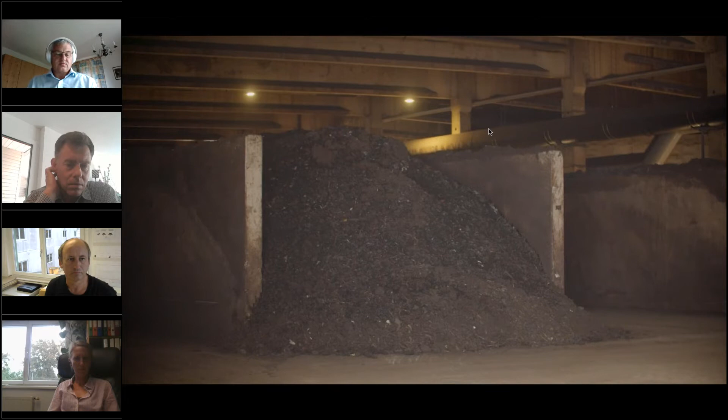Augsburg, Germany. DiBiCoo is an EU-funded project within Horizon 2020. The aim is to bring established biogas markets together with upcoming biogas markets over the world. The waste treatment facility in Augsburg consists of an incineration plant next to a combined anaerobic digestion and composting process. The biogas plant deals with about 105,000 tons of organic wastes, such as bio-waste from bins and green waste.

The output is about 45 gigawatt-hours of biomethane, which is injected into the gas grid and corresponds to a supply of around 4,500 households with renewable heat energy. Additionally, around 20,000 tons of compost and 23,000 tons of liquid fertilizer are produced per year. The proximity of the waste-to-energy plant is a great advantage, as the entire energy requirement for the system comes from the waste incineration. An integrated exhaust air purification system ensures that the odor-intensive air from the digestion plant does not get outside, but into the furnace of the thermal power station, where it is used as combustion air.

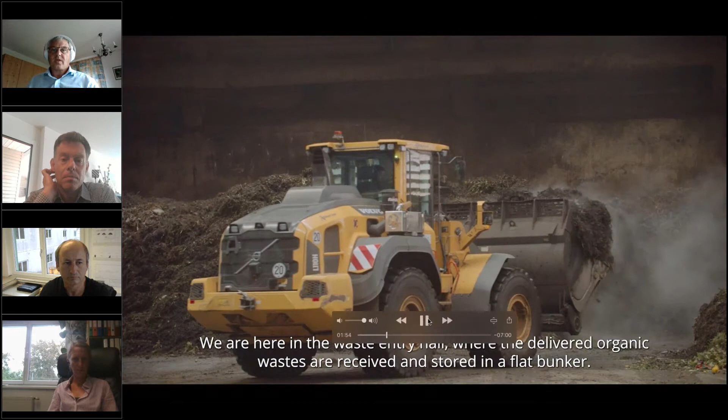In addition, the biofilter also provides valuable services. It consists of crushed root wood on which microorganisms settle. These break down the odorous substances biologically. We are here in the waste entry hall, where the delivered organic wastes are received and stored in a flat bunker. The wastes are mixed with tree and shrub cuttings and fed to the coarse processing.

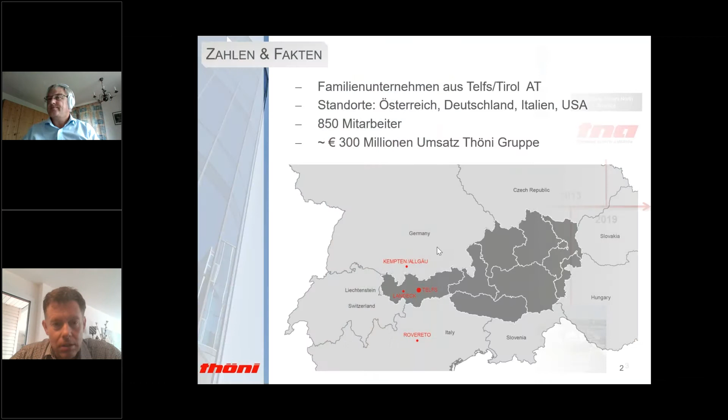I'm not sure if you understood right, because the quality was really bad. Reinhard, could you follow? Yeah, I think I could follow, or I try to follow. And Sindre, maybe you can switch over to my screen so that everybody can see it. Sindre, may you switch the screen? Can you see my screen right now? Yes, we can see it. Oh, now I have to go to the end of the presentation. Sorry for that.

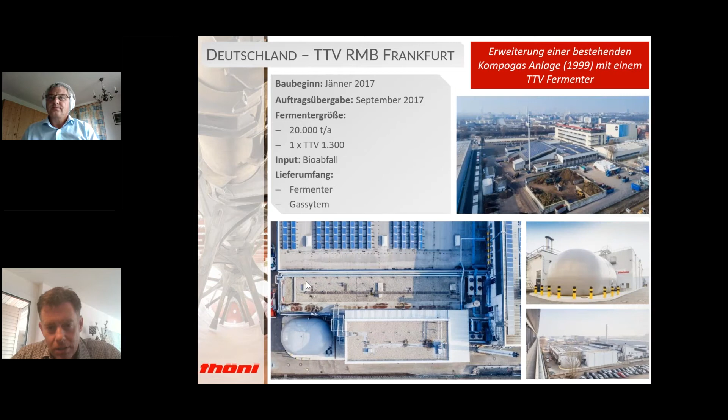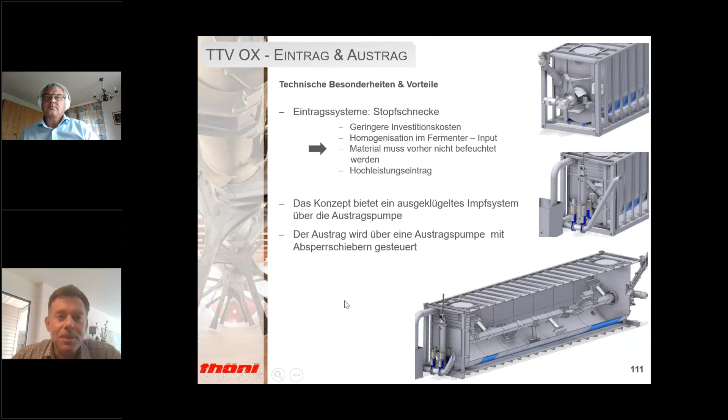But we have a very special product within Thöni, and it's called the TTV Ox. It's a quite nice and interesting product. It's a very small digester. As you see, it's built in a container, and in principle it's the same, just a mini digester. And if you talk about really small amounts of waste, this might be suitable, particularly for African utilization of small amounts of waste.

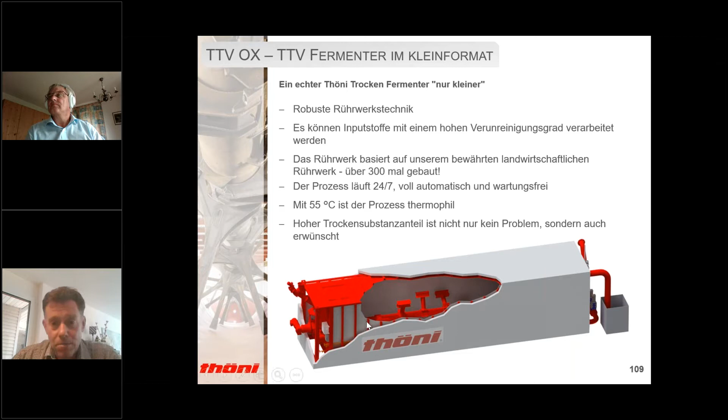And as you see, the principle is the same. You have a plug flow digester, you have a quite small agitator and a stirring system. You pump in the input material, you take out the output material. In principle, it works in the same way as the big digesters with a quite big volume. And here you have this small digester.

I can just give you an impression of the cross section of such a fermenter. Imagine this is built in a 40 feet container, so you can feed your really small amount of waste daily into a flap and into an intermediate bunker, and then this small amount is pumped into the digester.

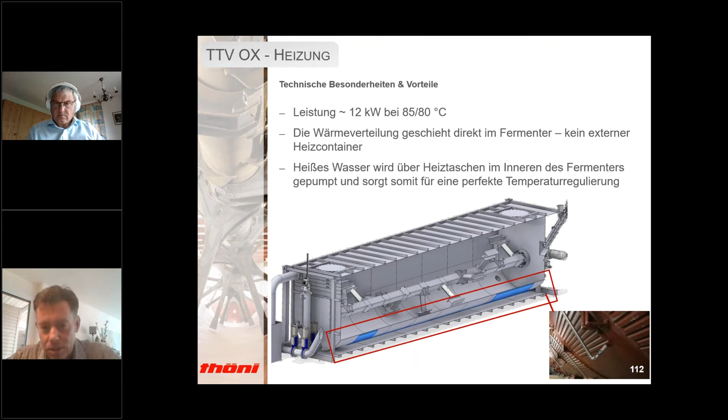And yeah, maybe I have to interrupt because it's getting a little bit late. Did this answer your question?

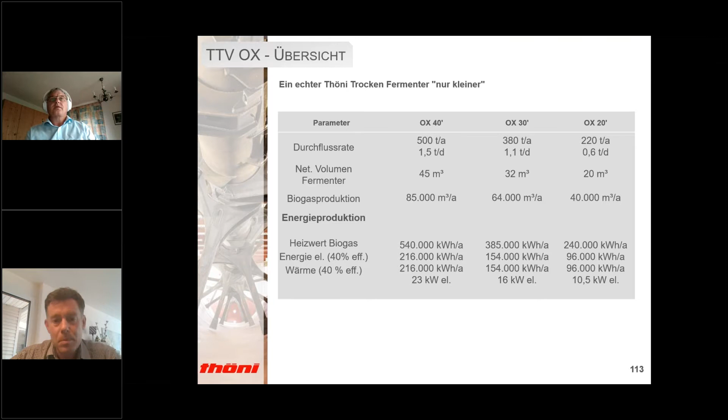And yeah, I would be happy if you would be interested in such a product. Maybe I can send you some information about this very, very small digester. And particularly if you have maybe 2, 3, 4 farms, then it might be quite interesting for you. So hopefully this question is answered right, and we understood it right.

Sinja, can you? Would like to get more info. If Reinhard could forward it to me, we'll drop you an email address. Yeah, perfect. Sinja, can you take us back to the normal screen? Yes, thanks. There's one remaining question. It came up from Bernhard Ruzek from Austrian IR. Bernhard, may you raise your question, and Sinja, unmute him, please.

A very cordial welcome to the DiBiCoo study tour today in Utzeneich, Austria. DiBiCoo is an EU-funded project within Horizon 2020. The aim is to bring established biogas markets together with upcoming biogas markets over the world.

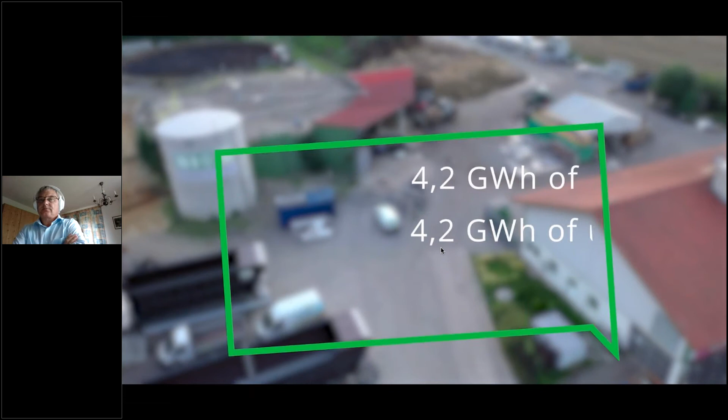The biogas plant in Utzeneich deals with about 2,000 tons of catch crops, 6,000 tons of maize straw, 500 tons of grain straw, 500 tons of grass, 1,500 tons of manure, and nearly 2,000 tons of slurry. The electric capacity of the CHP is 500 kilowatt, and the annual output is about 4.2 gigawatt hours of electricity and about 4.2 gigawatt hours of used heat.

The catch crops and the maize straw are harvested at the same time, so the feedstocks can be ensiled at the 3,000 square meter silo. Whereas the straw itself has too low a water content for ensilaging, catch crops are an ideal partner, making sure that the ensilaging process happens properly. Every cargo is weighed and documented. This takes place next to the entrance at the weighbridge and the office.

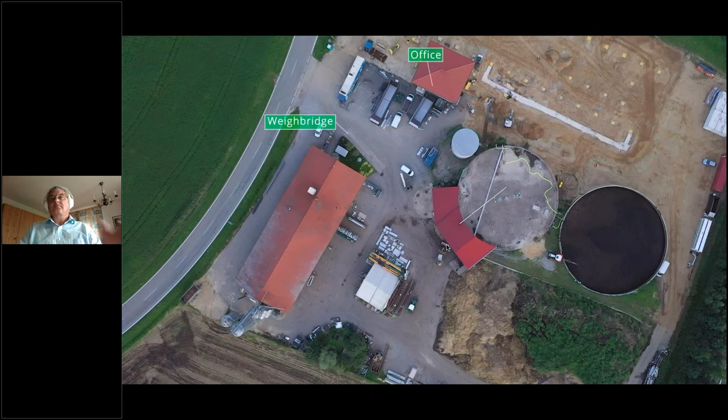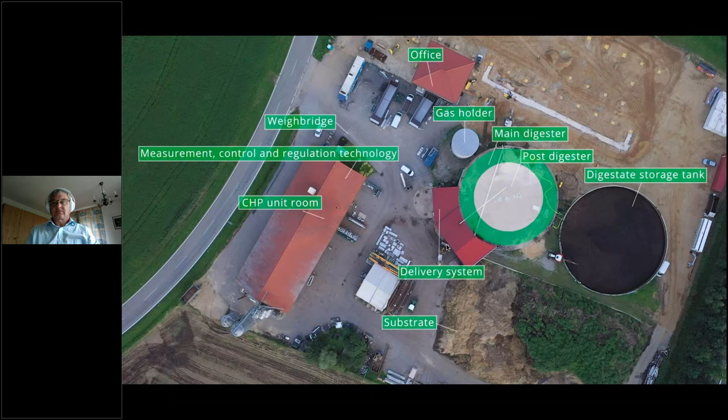Next to the weighbridge, the delivery system is located, wherefrom the main digester is fed. The digesters are built as a ring-in-ring system, whereas the main digester with a capacity of 2,300 cubic meters is the outer ring. The 2,100 cubic meter post-fermenter is located internally. The digestate is stored in a 5,800 cubic meter storage tank and is used as fertilizer at the right time and the right rate. The feeding system is filled with 30 tons of substrate every day, via a walking floor.

Thank you, Sinja, for the intro. And now Josef Heckner is already here again. He is the CEO of the biogas plant and also the founder of the company Verity, which deals with development of pre-treatment systems for straw and other agricultural residues. And they have made great development to pre-treat these feedstock streams, which are a main source in future biogas plants. So please, if there are already questions, please raise them.

So there's a question from Enoch Echipong. I'm not sure if I've got it right. Sinja, you may open the micro, and please, Enoch, apologies for not saying your name right, and may you explain yourself. Is this Enoch? Yes, yes. Just a second. Hello. Yes, we can hear you. Please. Oh, great. So yes, it's Enoch Ejipong.

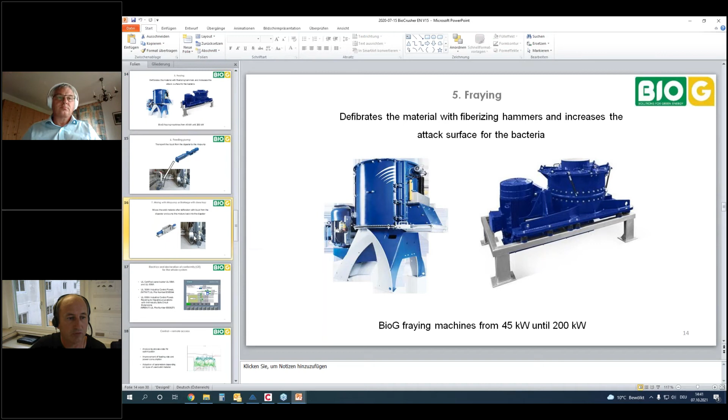After defibration, normally we go dry or wet into the digester. If we go wet, then we work with liquid pumps. You can see here the defibration machine and then a liquid pump, so you can mix the solid with the liquid. If you have drier materials, then more in the direction of liquid feeding. But if you have normal manure like cow manure with 25% dry matter, then it's also possible to go directly into the digester with an auger.

This is also very dependent on the kind of digester. If you have a full mixing digester, then you can work with the drier materials. If you have a mixing system where you only mix parts of the digester, then it's better to work with the liquid feeding system. But for this, we have to look at the whole digester system of the existing plant. Thank you very much.

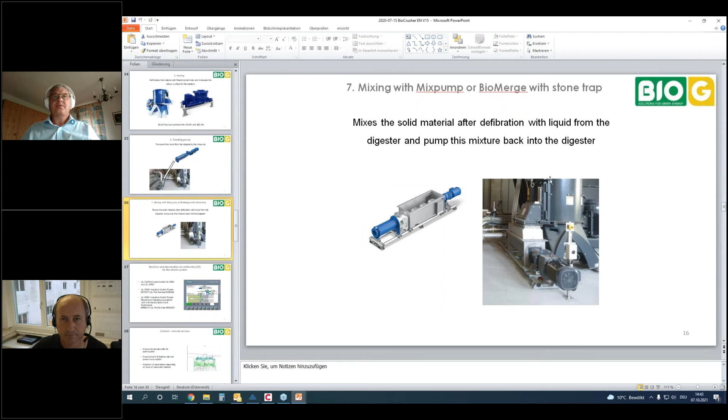May you close the screen, Sinja? I have one hand raised, and it's from Enoch. Enoch, do you still have a question? Sinja, may you unmute him so Enoch can raise the question? And if not, please let us know. Enoch, I have unmuted you. Yes? Okay, maybe it's the old one, the question from before. And Harry raised the question. May you unmute Harry.

Yes, thank you. On the compost that is produced from agricultural waste, I wonder if you have an off-taker for that, and what are the reasons why people are buying all the compost that you produce, whether it's already competitive in comparison to ordinary fertilizer? That's the question. Thank you.

I'm not sure it was a question for the first biogas plant for the dry fermentation. A short answer from my side, Josef. May you go further on.

The compost is very important because it has a high content of organic carbon in it, and additionally, it is hygienized. So it's a very valuable source, a very slow feeding nutrients system, organic system to the soil. If I have a degraded soil, it's very valuable. It increases the field capacity, meaning if you have a season where it's humid, high humidity, and then low humidity, low rain, it increases the field capacity, so you may not need to irrigate. The soil is upgraded. It's a very valuable source.